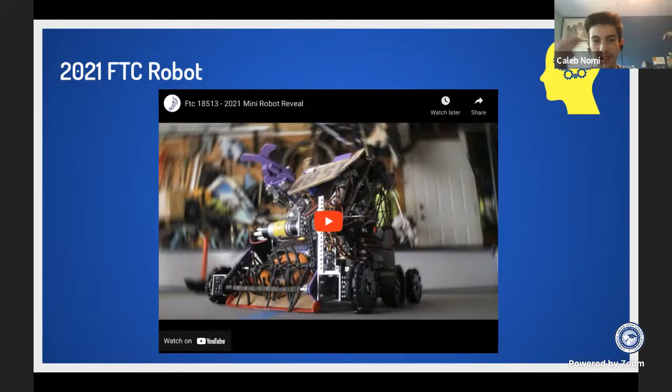Here's a little robot reveal that we made a little bit ago about our 2021 FTC robot. So that's FIRST Tech Challenge - check it out.

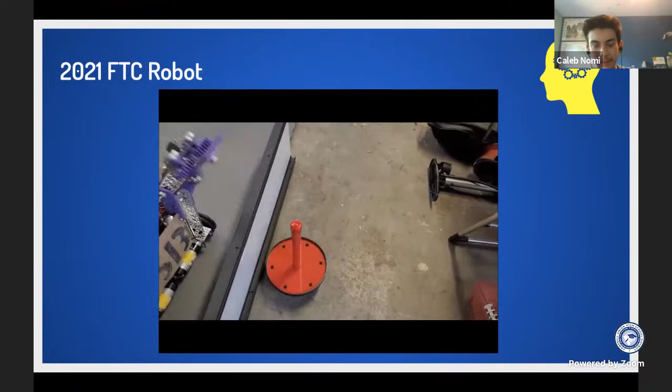All right, yeah, so that's our little robot reveal.

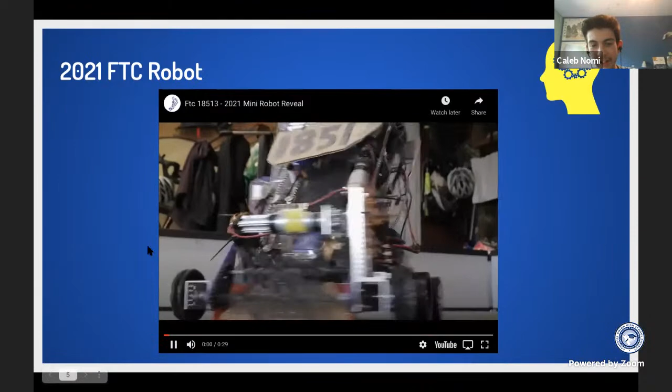Was I presenting this slide? Me, cool. All right, so competitions. Every year in FIRST we get a new game that we need to build a robot for. In a normal game season, we play in 2 off-season competitions and 2 season competitions, and then championships if we qualify. Our best rank so far is 4th in 2019 in FRC.

There's always a lot that goes into building a robot and doing robotics, so we organize our club accordingly to manage everything. We have 4 board members who basically manage the club - that includes the president, vice president, secretary, and treasurer, as we mentioned before. We also have some sub-team leads who manage different aspects of building a robot - for example, there's a hardware fabrication lead that manages the fabrication aspect of the robot, electrical lead, design lead, software lead that manages the software of the robot, and a whole lot of other leads that go into managing and doing robotics.

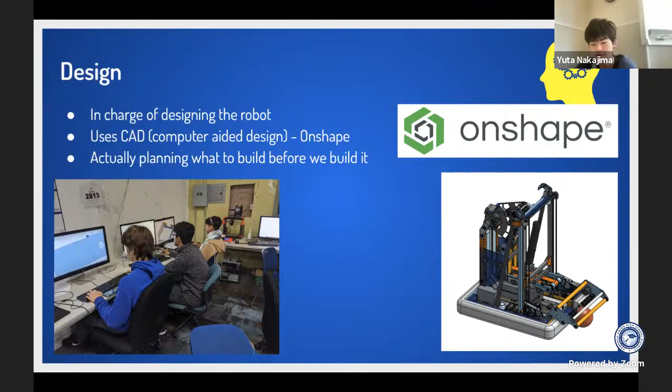Hardware fabrication is another sub-team. We are in charge of facilitating the actual creation of the physical robot using instructions that come from hardware design. We get to use a lot of cool power tools, and we teach a lot of skills that are important in life. It's also very fun because we get to work together to make something greater than the individual parts.

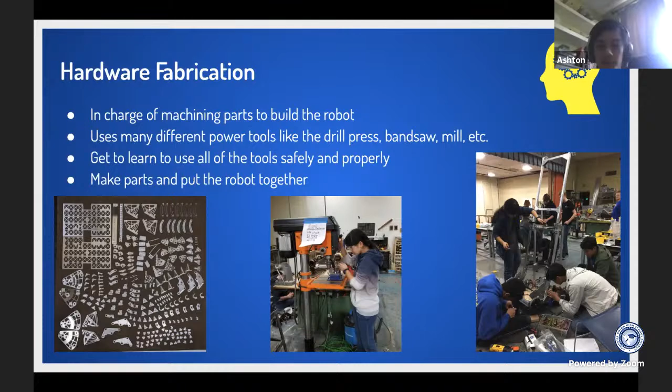Hardware electrical is another part of the actual building of the robot. This team is in charge of all the wiring for the robot, connecting all the pneumatic parts and electrical parts. It's basically about making sure every part is functional and can transmit information. This team is very practical because it applies to working on Arduinos, designing custom boards, troubleshooting, and a lot more stuff.

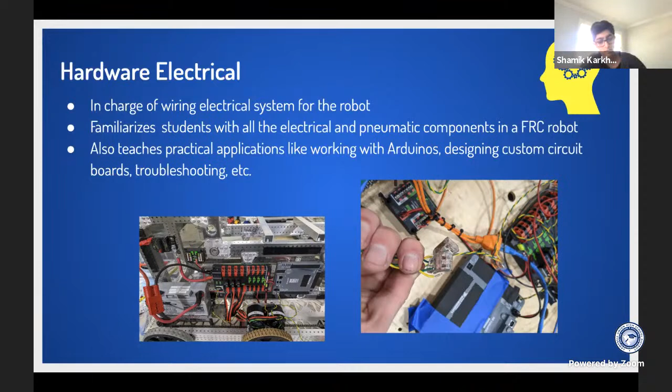The software lead wasn't able to make it today, so I'll be going over this. Software is what's responsible for making the robot do stuff. In the last slide we covered all the hardware stuff, which is basically just a skeleton of the robot. In order to make the robot do stuff, we have software. The code we write tells the robot what to do during a match, and this will include responding to driver input through a controller, making the robot move on its own, and many other things. That's pretty much the role of software.

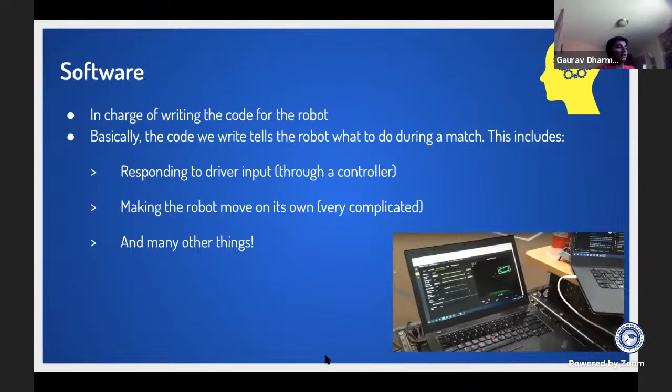Management is also a really important thing to do in the club, and this is mainly covered by the secretary. We have a lot of accounts that we manage, such as G Suite. For those of you who don't know, G Suite is basically a combination of all the Google products like Google Calendar, Gmail, and Google Drive. We have accounts on all of those, and we use them to coordinate and collaborate with each other. It makes everything really easy to use because there are a lot of functions made specifically for those types of applications. If you know what Slack is, we also use that too.

Slack is pretty much our main source of communication, and it's really suited for what we do at robotics because a lot of its features are made specifically for collaborating in an office workspace type of area. Also, the secretary manages a lot of manual paperwork. So yeah, that's management.

Now we'll talk about the finance subteam. Like how in the previous slide we discussed management playing an integral part in robotics, finance plays a pivotal role in how our team functions because the finance subteam handles anything money related. This includes grants, check requests, purchase orders, reimbursements, and collecting funds. As we know, robots are really expensive, ranging from getting circuit boards and Arduinos to even paying for competitions. There's a lot of very expensive matters that come with being a FIRST Robotics team. So it's the job of the finance team to properly allocate funds and develop a budget in order to accommodate all of those things.

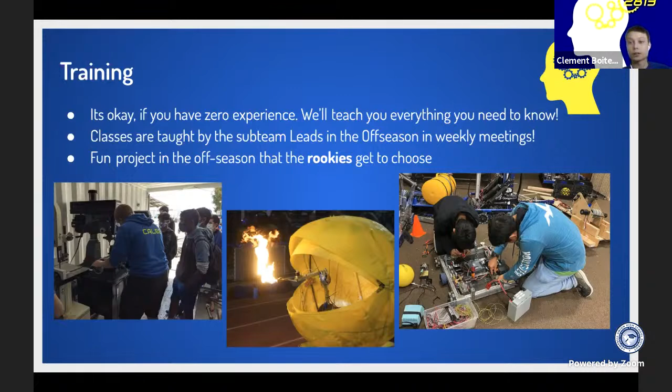I know we've talked about a lot of stuff on this team, but you're probably wondering why you should join. Being on the FRC team gives a variety of opportunities. FRC gives students early exposure to STEM, which isn't found in any other club, so if you want to pursue STEM in the future, it's best to start early. We also offer other important skills like business and marketing. Being on a complex team with many different sub-teams, we learn a lot about teamwork and leadership, which is super important for later in life.

We also have a lot of sponsors that supply us with funds, and they sometimes let us tour their facilities. In the past we've gotten to tour Lockheed Martin and Acosta. Last year I went to Acosta, and it's really cool to see the giant laser cutters and water jet cutters being used—it's like the fabrication team, but serious.

On top of that, FIRST offers up to $80 million in scholarships that can seriously help you out when you start considering colleges and future plans.

And finally, we're just a huge friend group. A lot of us come into robotics not knowing each other at all, but after learning with each other, teaching each other, and just having fun building robots, we're all best friends.

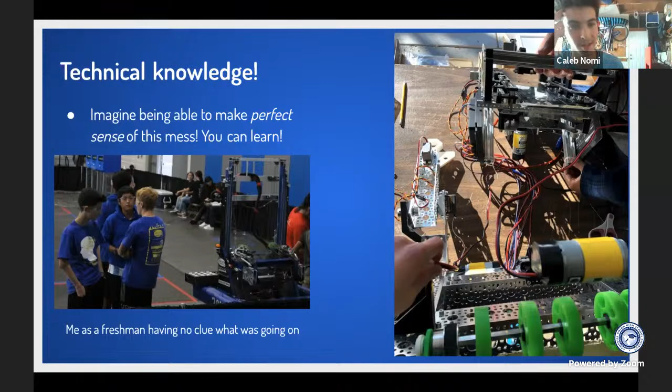That right image is our FTC bot, and you might look at it and wonder what's going on. I'm able to make perfect sense of it, and you can learn how to do that too. You can learn about all the technicals, whether it's software, hardware, fabrication, or electrical—you name it. You can learn this stuff and know what's going on, and it's really cool.

In addition to technical knowledge, you can also learn very cool non-technical knowledge, such as how to lead and delegate to people. You can learn how to make cool media graphics, and delegate with others through outreach skills. You can also learn how to handle finance, grants, and POs, and how to scout using analysis skills. When these non-technical skills come together with the technical skills, you'll make the most of your robotics experience—it's really a taste of the future, kind of like a simulation of working at a company, and it's really fun.

So this is the FTC bot—First Tech Challenge. I actually have the bot with me in my garage right now, so we'll go over a few slides about what the bot is, and then we can see it live and demonstrate what a bot would look and function like, because bots are one of the coolest parts of the robotics team.

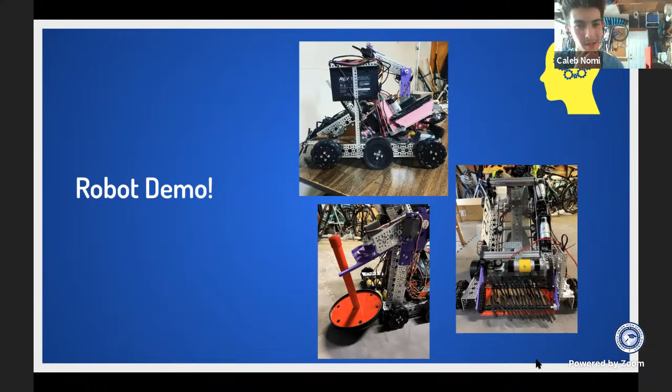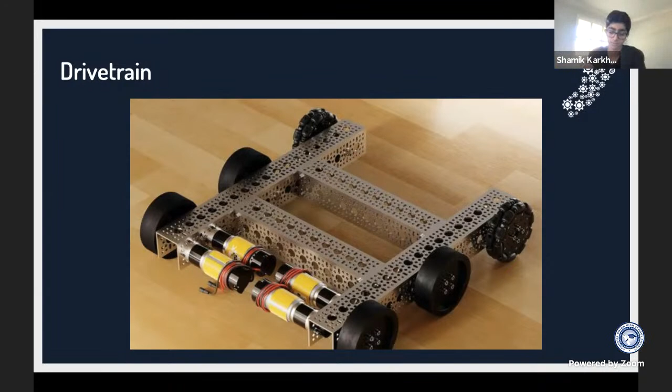So we chose to go with a pretty simple off-the-shelf drivetrain, just to keep the entire build relatively simple and use what we know works.

Yeah, it's pretty cool. You can just buy stuff like from a vendor. Sorry Hally, I kind of interrupted you.

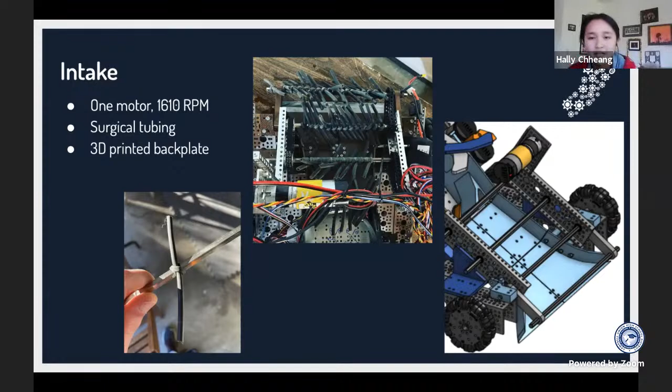That's fine, I'll just talk about the intake a little bit. In this game, part of the challenge is to pick up these foam rings. They're about 6 inches in diameter, and you have to shoot them into a goal. So first we have to get them in the robot, and that's where the intake comes into play.

So this is our intake design. You see those axles that a bunch of surgical tubing is knotted around. Those will spin really fast, and that will eventually get the ring into the robot. It's powered by one motor, and it runs at about 1,610 RPM. And you can see also on the back, there's a 3D printed backplate, which is used to center the ring and guide it into the magazine.

By the way, this is what the ring looks like. You might be able to see on my camera, not sure if you can. Wait Hally, can you mute? Perfect, so this should be spotlighted now. So this is what the ring looks like.

Pretty cool, and yeah we have to pick this up somehow. So that's how we do it. Thank you, Hally.

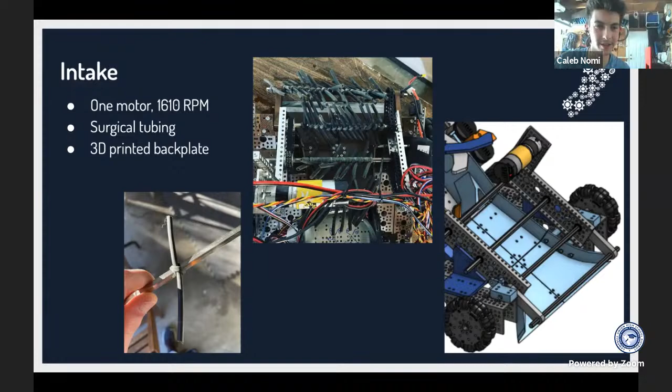And then we have the magazine. The robot's actually allowed to hold 3 rings at once. So we have to find a way to hold them, but we also have to find a way to shoot them. So we stack the rings up inside the robot. We have mechanisms to stack them up inside the robot, and I think I'll be able to demonstrate them in a little bit.

If you don't understand a lot of this, that's totally okay, because it's very easy to learn. As part of the robotics team, you'll get to intimately know exactly how all of this works. But anyways, we have a flicker here that flicks the rings into the shooter.

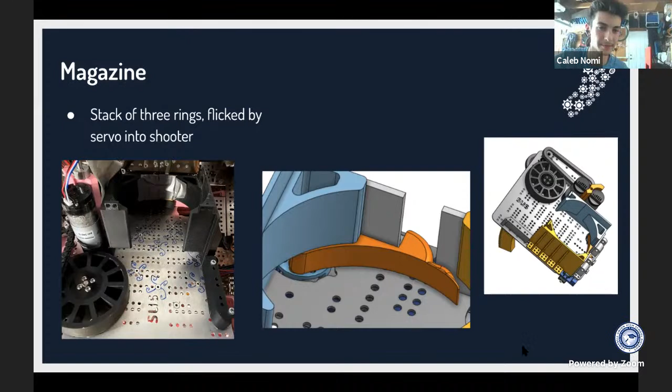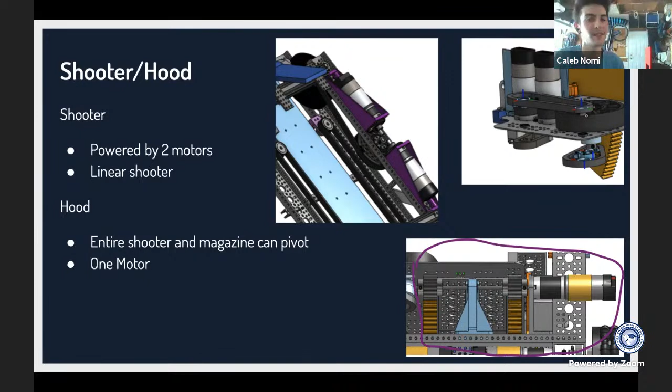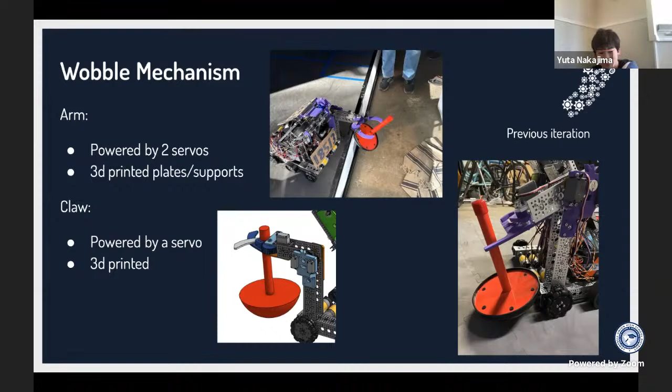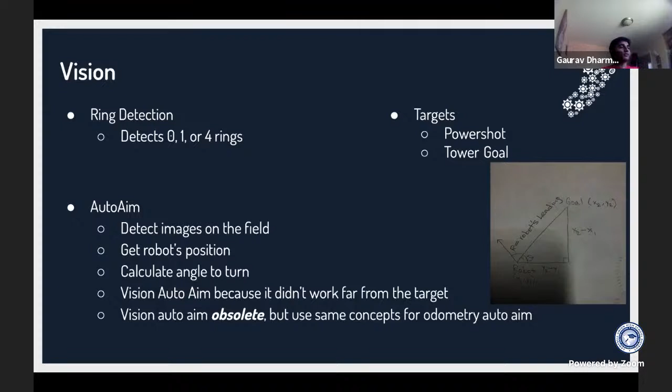Yeah, so I think we can do the robot demo. We'll keep on this slide. But just to emphasize again, these are some complicated terms you may not understand, but if you join robotics, I can guarantee you'll be able to learn all of this stuff, and you'll be able to implement them. It's really cool.

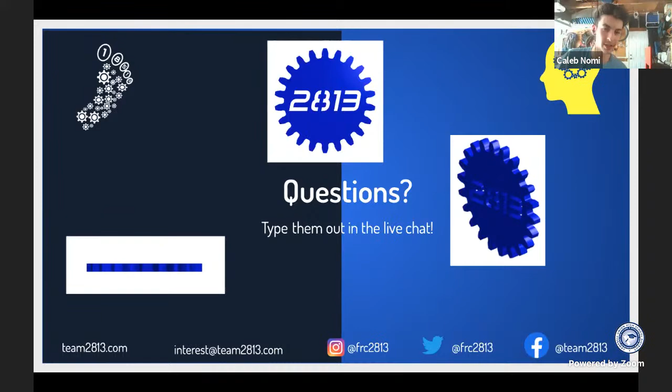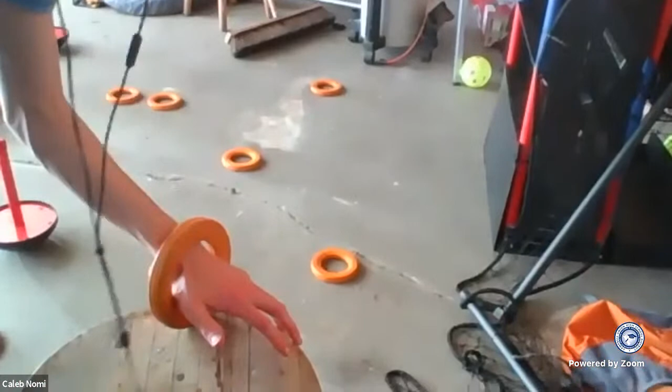So if everyone else can turn off their cameras, that way the demos... alright, look at that. So this is our robot. As you can see, it is moving.

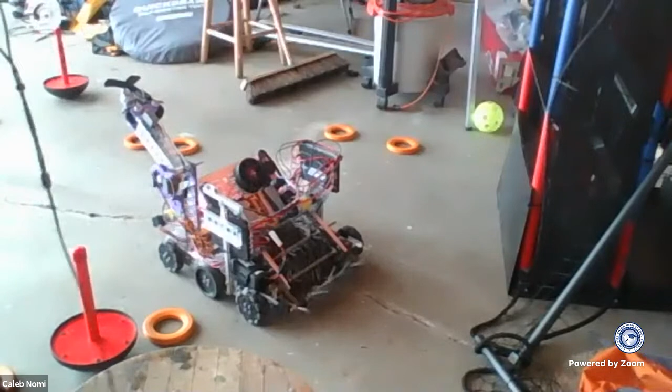Pretty cool. So a few things that we can do, we can pick up rings. So this is kind of representing the intake. We go like that, and there we go, we have a ring in there now. Let's get another ring. So you might be able to see how the rings are stacked a little bit. We have two of them now.

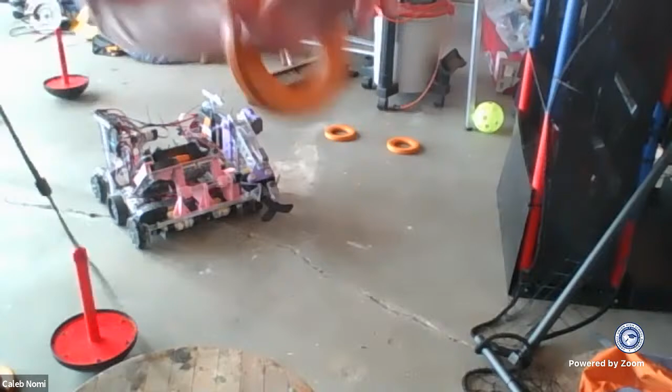And it's there, now we have three rings. So if we wanted to go shoot them, let's go over here. Oh, the robot broke. Something kind of annoying is that we're on a concrete garage floor right now, which is a little inconvenient because we used to have an FTC field, but we ended up giving it away to another team because we wanted to donate it.

So let's see if we can do this. Hey, there we go. Alright, go like that. Let's see if we can shoot them now. And there we go, that just shot three rings.

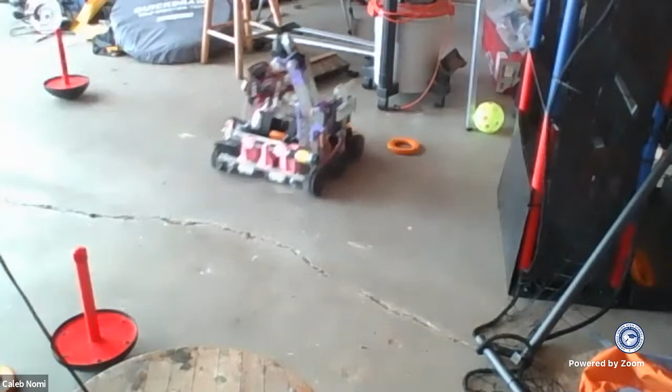So if we wanted to get three more, and just like that, we have three rings into the robot now. Okay, and then if we want to shoot them... oh dude, I made it. Oops, I made the robot too close to the goal, so it deflected off.

But you know, we can do it one more time just to show you guys what this robot can do. And there we go, that's three rings. So now let's shoot them. And there we go, three into the goal.

And then the other thing this robot can do, because we can do more stuff than just that, is you see this arm thing right here? I'm making it go up and down right now. This thing can get the upside-down shroom that Yuta was talking about and lift it up. So then we can drive around.

Let's say we want to deliver it over here. You can't see that — there we go, you guys can see that. Oh wait, we just put it back. And now we back up. And there we go, we've just moved the wobble around. And what that would do in the game is actually give us points.

So you can see here, let's say we want to put it over here. And there we go, we just picked it up. So that's our mechanism. And the cool thing about the claw is that we don't have to be lined up perfectly — as long as the top of the shroom is somewhere in between the length of this claw, we can pick it up just like that. It was really fun to develop this mechanism, and it took a lot of prototyping as well.

And yeah, I think that concludes enough for the robot demo. If you guys join robotics, you'll be able to interact with the robot. You could even help fix the robot or change the robot. There's so much you can do — possibilities are endless.